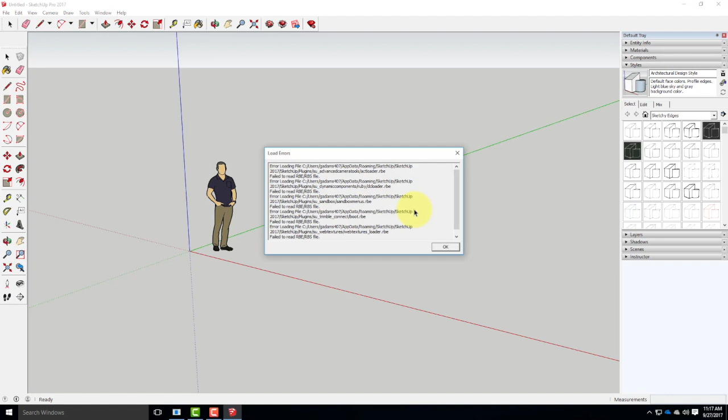So I'm going to go ahead and use the architectural design feet and inches, as that loads up. We'll give it a second to pop up all its errors, because of course on the school computers we can't have everything work perfectly, so we have to have some errors. And once that's done, I'll be able to get my geolocation. There we go, there's our errors. Let me get rid of the little person here.

Don't need him. And I'll go to File, Geolocation, Add Location. This is where I'm going to pick a particular location. Let's go ahead and go into Mount Diablo and do something in here maybe. Yeah, like that. I'll click Select Region. We'll go ahead and grab it.

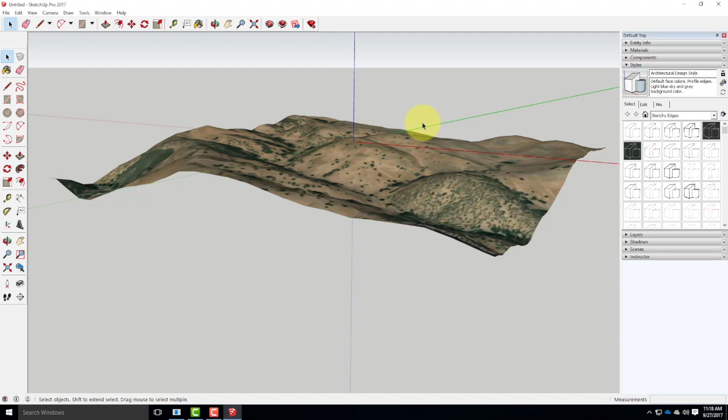And I can view this by going to Geolocation, Show Terrain. OK, that looks reasonable, and I can go from there. Obviously, this isn't the one that I'm going to use for today, but I'm just going through the practice.

I'll go to File and then Save As. And we just want to make sure that this is a SketchUp 2013 file so that it's ready to come into Rhino. So I'll go ahead and save it into today's folder. What are we on? There we go. And I'll go ahead and save. Perfect. Then we'll go ahead and switch over into Rhino.

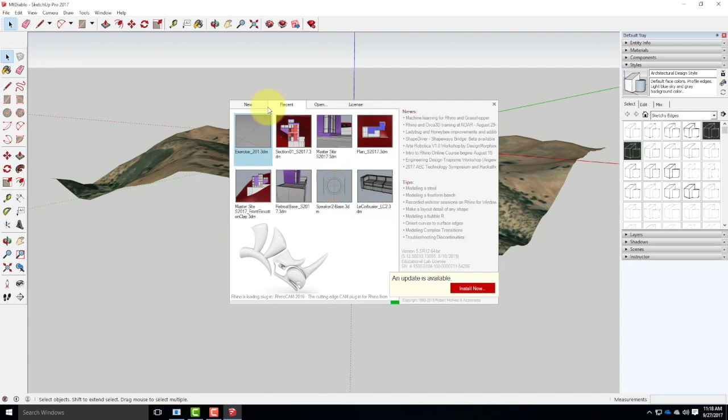And I'm going to create a new large object, inches. And eventually it'll open. There we go. And once I have this here, I'm going to bring in that SketchUp file.

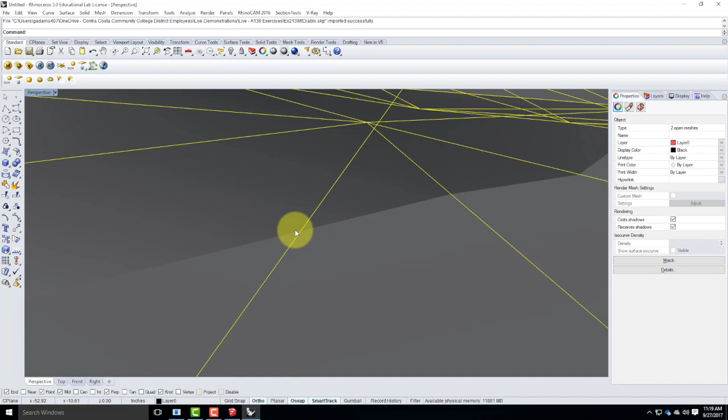So I'll go to File and then Import, and I will pick that file that I just created. There's Mount Diablo, let's bring that one in. Default SketchUp import options are just fine. We'll say OK, and then we'll zoom out and we'll have a look at what the resulting piece is.

So first off, I don't need this flat plane, we can make that go away. And then I'll clarify my layer structure here. We'll create a main layer called SketchUp, and I'll put all of the Google Earth terrain and snapshot and whatever, if I can hold down Shift correctly, there we go, onto the SketchUp layer. And then we'll minimize that and leave it for later on.

We're going to create two other layers because I'm going to do the contours of this mesh to create the NURBS surface. So I will go in and create a contour X and a contour Y. And then I need to go ahead and make those contours.

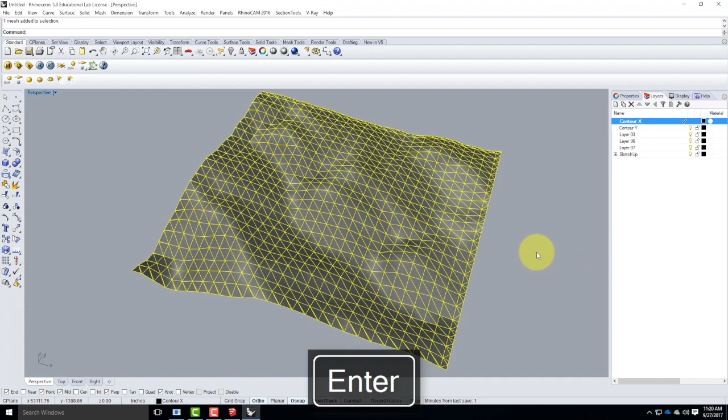So with contour X selected, I'm going to go ahead and go up to Curve, Curve from Objects, Contour, or I can just type Contour. Select objects for the contours, it's going to be the mesh. I'll hit Enter. We'll start at this corner. If it's not snapping, remember to turn on your vertex snap. There it is, and we'll go off in the X direction here. And my interval, we'll do maybe 100 feet.

There we go. I'll switch to contour Y as my layer, and we'll do the same thing from the same point. Go off in the Y direction, 100 feet. There we go, so I have contour X, contour Y.

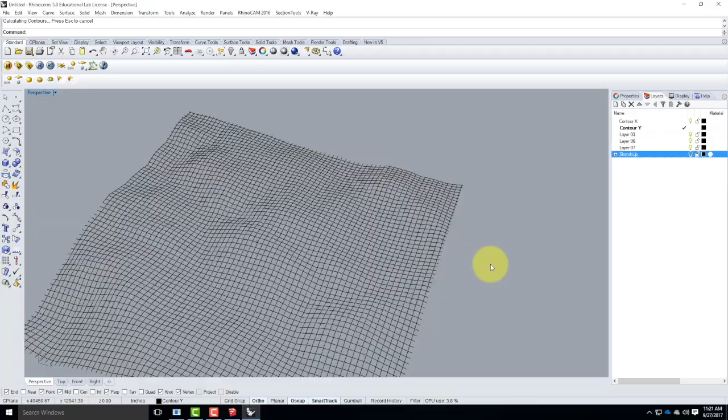At this point, I'm going to turn off the SketchUp file altogether. I'm left with just the little wire mesh that represents my terrain. I need to trim off those extra pieces, so we'll come in here. Let's make top full.

Once I have those selected, I'll go ahead and go to trim, and we'll get rid of the pieces on the sides here. There we go, so that's all nice and clean. Let me zoom extent so we can see the whole thing.

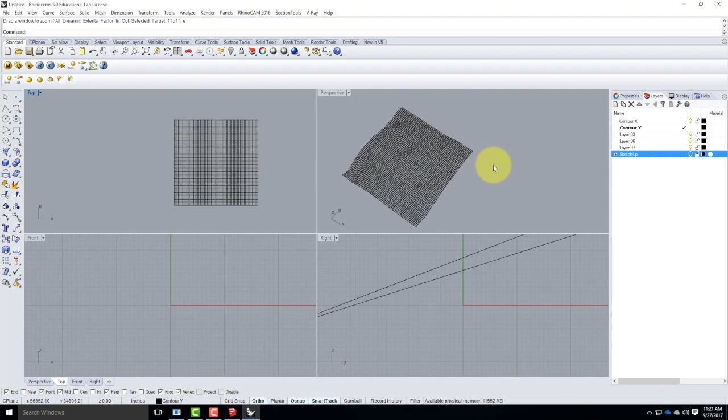It's clean edges, we're ready to make that NURBS surface. So in order to do that, I'm going to do the curve network or the network surface. I'll select my curves and either type network surface or go up to surface, curve network. Yeah, that's fine.

Actually, before I do that, let me create a new layer. Let's call this terrain and make that the active layer. And then we'll do a network surface.

There we go, it automatically recognized correctly. And we'll give it a little bit of time. Remember, this can take a few minutes to process, so let it go through.

Yeah? Last question, just a quick question. Whenever the layer is selected and we do any changes on the screen, is it automatically set to that layer, or do we have to change the layer?

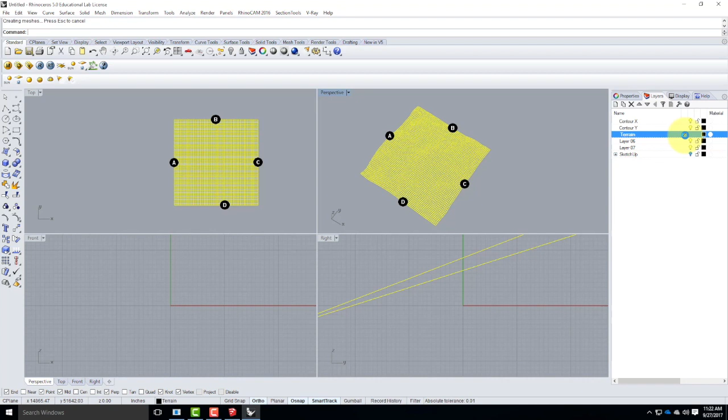As long as the layer has that little check mark next to it, that means it's the current layer, so anything that you do will show up on that layer. And we don't have to right click on the layer to change that? No, because it'll be on that layer by default.

OK, so I have that. I'm going to click off and then click on the surface itself, which is, remember, that really dense surface, and I'll go ahead and rebuild that surface. So I'll type rebuild, or I can go to the edit menu and select rebuild. It would be under edit rebuild.

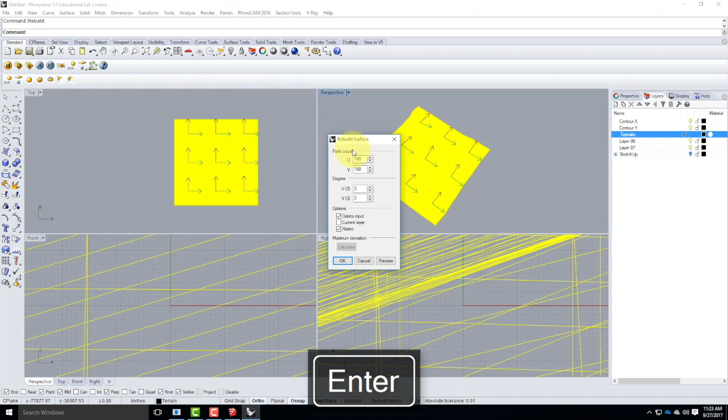And I'm going to do 100 by 100, and I'll go ahead and say OK. Remember, I thought that was about the happy medium point. You could do something a little bit finer if you wanted, or a little bit less.

Let me turn off the contours in X and Y, and we'll have a look at this surface. Yeah, it's pretty good. It's got a little bit of the triangulation, but it's reasonable. So I'm going to go with it as my 100 by 100.

OK, so now that I have my terrain set up, now I need to start thinking about this as if it were a physical model that I was going to cut out. And that's where the little cheat sheet comes into play.

So it was available on the course website, which of course I closed down, so it's not here for you to see anymore. It would be under exercises, and if you went to today's exercise, it's linked down at the bottom, but of course I'm not logged in, so you can't see it. But anyway,

when we look at that, we're looking at that little chart. It's on the bottom of your handout anyway, just in case. And we're looking under the 11 by 17 size. And we're going to make a rectangle at the scale that we want to be at.

So I'm going to use 1 to 250, which would be the rectangle would be 4250 feet by 2750 feet. So I'll go ahead and create a rectangle.

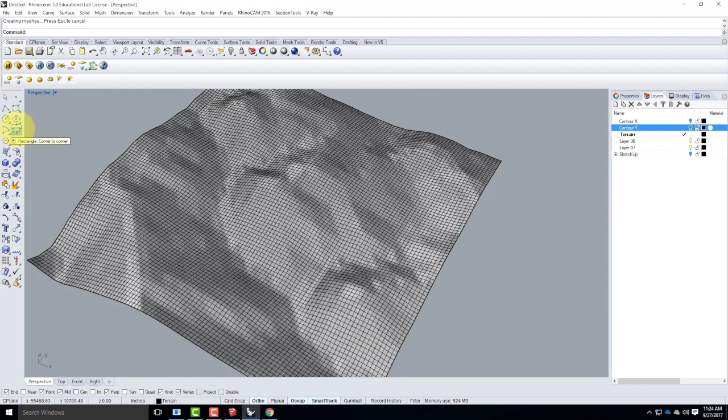And I'm going to move it later on, and I'll say at 4250 feet, comma 2750 feet. Remember to put those little feet signs in there. There we go, there's my rectangle, and now I just need to position it over the terrain in the place

that I want. It can be a little challenging to figure out where that position is. Sometimes if you switch from wireframe into shaded mode, you can kind of see what's happening and pick the desired region. Sometimes you have to kind of look at it from the top view and decide which one looks right.

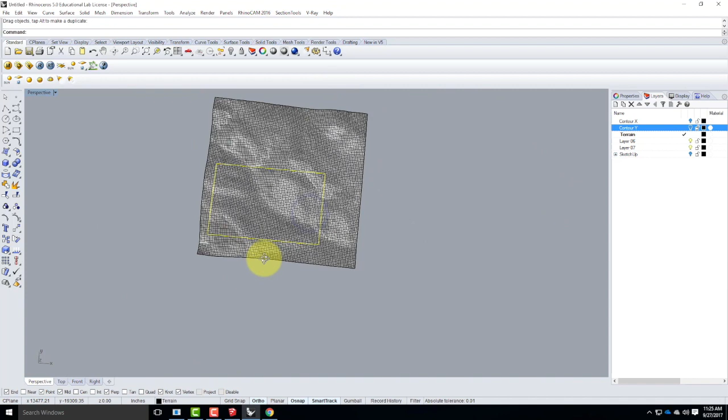Once you have that set up there, then it's a matter of I need to project this rectangle down onto the surface so I can trim off the extra. So I'll go back to the top view. There it is. I'm going to type project, or go to curve, curve from objects, project.

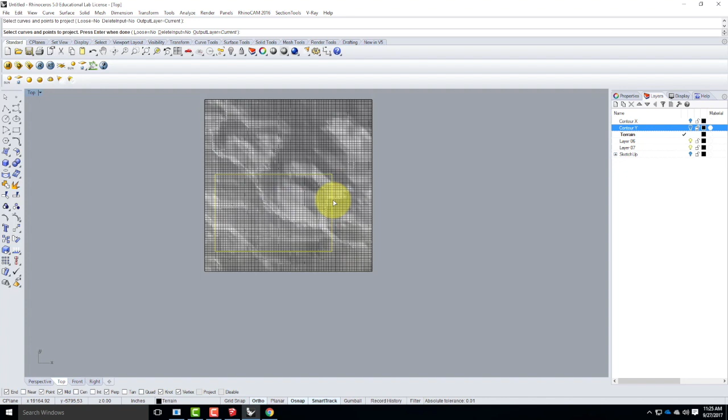It's going to ask me to select the curve first. So there's the curve I want to project, and I want to project it onto this surface. I'll go ahead and hit enter.

If I switch into the perspective view, we now see that that follows the contours of the surface itself. I can then go ahead and go to trim and trim off the extra bit of surface.

This is the piece of terrain that I'm going to model in 3-dimension. When I scale it down at 1 to 250, this is going to be 11 by 17, which fits nice and neat on the laser cutter, which is of course what I want. So now that I have this established, I need to do a few more things as part of this.

I'll create a new layer, and on that new layer, let me rename it here. Come on, oh I have to get out of my trim. Sorry, there we go. Let me rename this, and I'll rename this one to be, let's call it model steps.

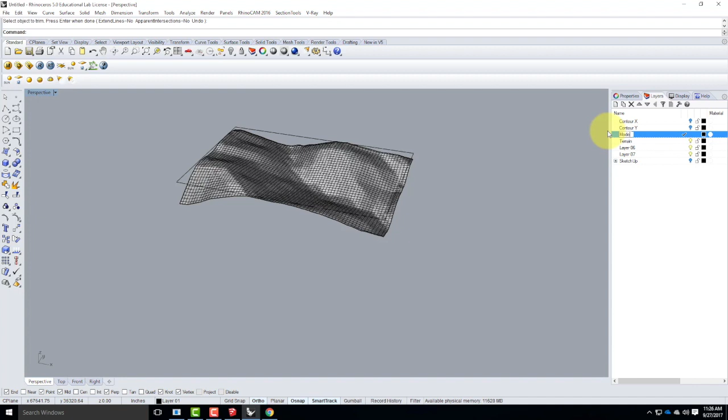It's the current layer, and I'm going to slice this piece of terrain up into the thickness of the cardboard that I'm making the model out of. Remember, the cardboard's 5/32 of an inch, assuming you use the bookstore cardboard. If you were using a different material, you'd have to measure it carefully. But I know it's 5/32, so we're good.

And I need to find out on that chart again, at 5/32 of an inch, at 1 to 250 scale, how large is that step? It's 39.063 feet. So that little chart helps you out there.

And when I create the contour, so I'll type contour, we'll start down here at this point. Remember, it has to go in the Z direction, so a lot of times you have to move into one of the side views to go straight up in the Z direction. There it is. And my interval, or my distance between contours, is going to be 39.063 feet. I'll go ahead and hit Enter.

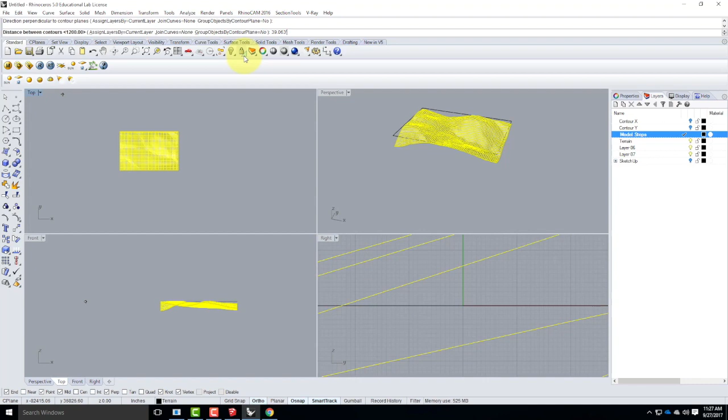And it will slice up this particular piece of terrain for me. At this point, I can go ahead and turn off my terrain and any of the other layers that I'm not working on. And now I need to go ahead and set up the steps for the sides of this particular piece. Like I said, we're going to concentrate on fixing the problems that happened last class as we go forward. But I'll go ahead and go through.

I picked deliberately a contour that wasn't quite as steep as my last one, but I also have my last one ready. So I'll show you that one too, but I'll go ahead and go through this one because it's not going to take too long.

So I'm going to create a new layer, or rename this layer, and we'll call this model sides. I'm going to change the color of this layer to be red, just so that I can see it in contrast to the other things that I'm working on. Let's go ahead and put that up next to the model.

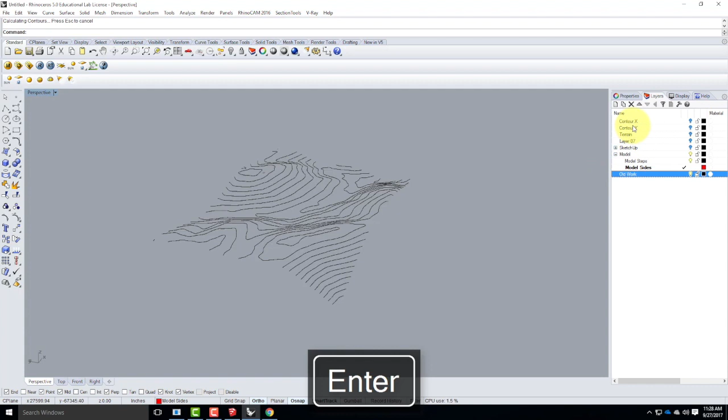And you know what, we could take this a step further and create a new layer called model, and then put the model steps and the model sides underneath the model layer in the interest of organization. I could also create a new layer that's outside of that stack, and I could rename this old work. And I could take Contour X through SketchUp and drop it onto the old work layer and minimize that.

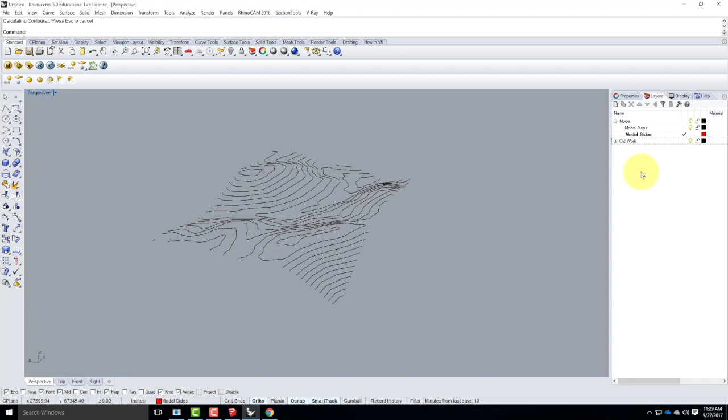The more you start to get in the habit of cleaning your layers, the more when you have 150 layers, it suddenly is a little bit cleaner because you were thinking about it in the process. If you don't, you'll end up with a couple hundred layers and you'll be confused. So the more you clean that up, the easier it'll be long term.

So I now have my model sides layer active, and I need to go ahead and draw the steps as they go. I'm going to start right here on this side. Remember, there's two different methods for doing this. Actually, I'll start on this side because it's fewer steps to do the first method.

The first method, I'm going to go ahead and create little points on the ends of my lines. In this case, I don't want the single point. I'm going to right-click to get multiple points, and that will allow me to stick points on the ends of all of these curves.

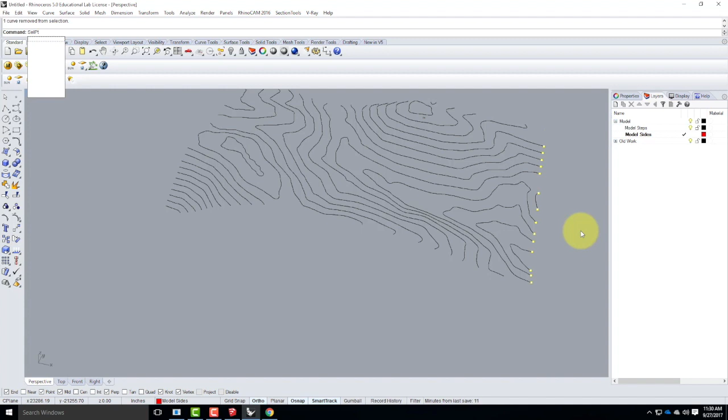So I have that with all those points. I'm going to select those points by dragging a box around them. If I do that, I have to deselect that curve because I don't need that curve. I could also type SELPT for select points, and it would select all of those points, just those points.

Then I'll go ahead and rotate 3D to rotate these points down so that they're flat. I'll pick that point there, go off into space, and fold those down flat.

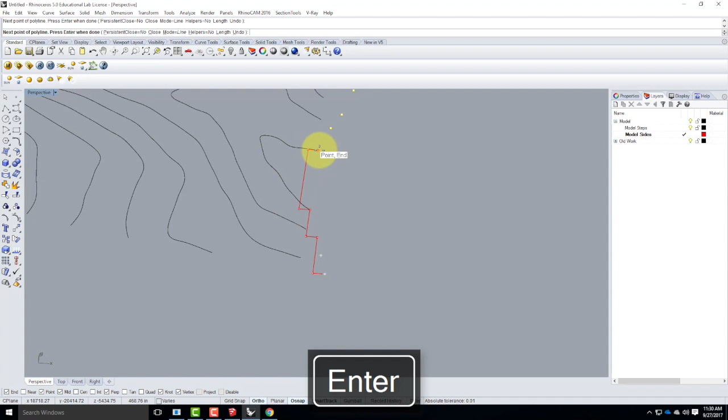Now I can go ahead and start to work through with my steps. We'll start at this point there and snap to perpendicular. This one, I have to go down, over, and back up. I know what the distance is - it was 39.063 feet. I can then go over and start to work my way back up this side.

So you guys are just going to have to bear with me for a little bit while I work through this.

OK, so there, at that point, I'm going straight across, which means that I'll go straight across here. Then I have to go back down to catch this next point, which I don't get to because it's going just this distance - 39.063 feet. That will come over and then back up.

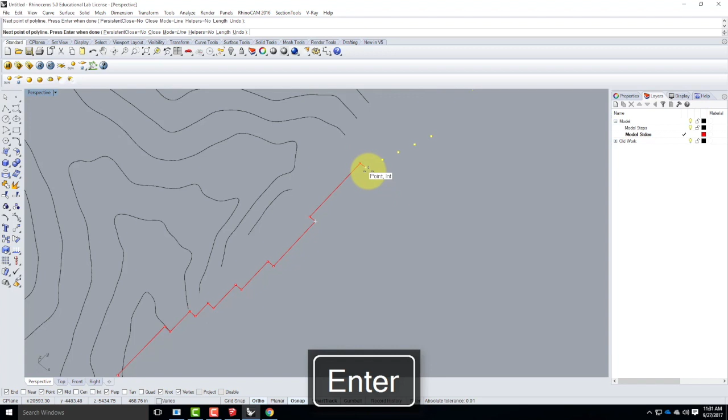So it's a little bit challenging to see what was happening there because I had just the crest of a hill and then I went back down and then I'm going back up again on this edge. So I'll work my way back up the rest of these pieces there.

And I'll go ahead and end. Oops, one more little piece right there. While I have it, let me join those two.

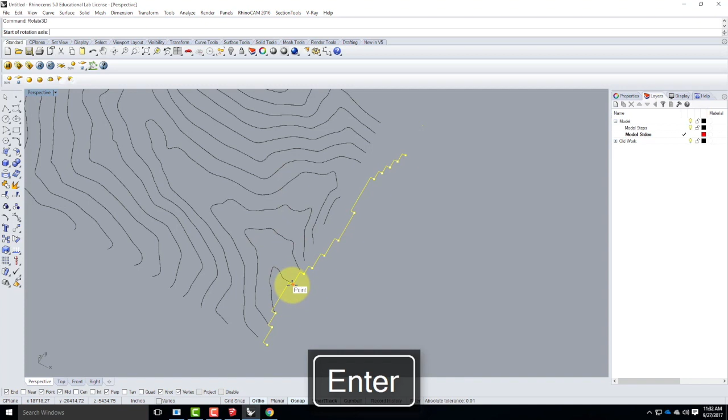And then I'm going to go back to rotate 3D. So I'll select my curve and then SELPT for the points. And then I'll rotate 3D, same point that I rotated from last time, and we'll fold those back up.

If I did it correctly, I can look at the side and say yeah, it looks like the steps work and they all line up. I can also confirm they're working by looking in one of the side views and seeing that all of the steps are vertical as opposed to being slanted. So that worked out pretty well.

Now, as I start to look at this, remember I told you this time we were going to spend some time looking at the corners and how things connect. It looks like there's a tiny little bit of a contour here in the corner that was left over from my contour. This particular piece is never going to work on a laser cutter.

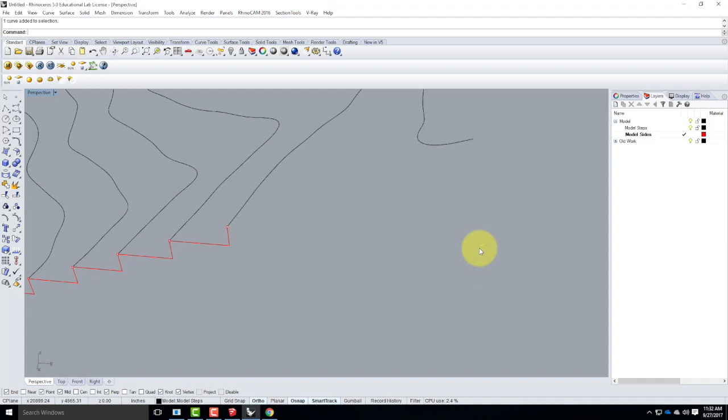It's just too small, so I'm going to go ahead and safely just get rid of that piece. It's okay for you to do a little bit of editing like that. Likewise, this corner piece right there is pretty small, so I'm going to go ahead and just get rid of that as well.

If the corner piece is big, or like in this case this sliver, it's kind of borderline - it might be okay to be there, it might be too small. Worst case is it gets burned up on the laser cutter, and then you just don't put it on. So for right now, though, I'll leave that one.

But I need to do the steps along the backside here, and then we'll concentrate on joining them together in a second. So when I do the steps along the backside, instead of doing this point method, I'm going to change that C-plane and adjust it so that it's vertical running along here.

And I do that by going to the little triangle next to where it says perspective, and I go to set C-plane 3 points. I'm going to start right there at that point, go off in the X direction in this case, then make sure that I'm going up vertically from that point. So we'll go right here to where I'm going up vertically. And if we look at my little grid, it's flipped around to be in position.

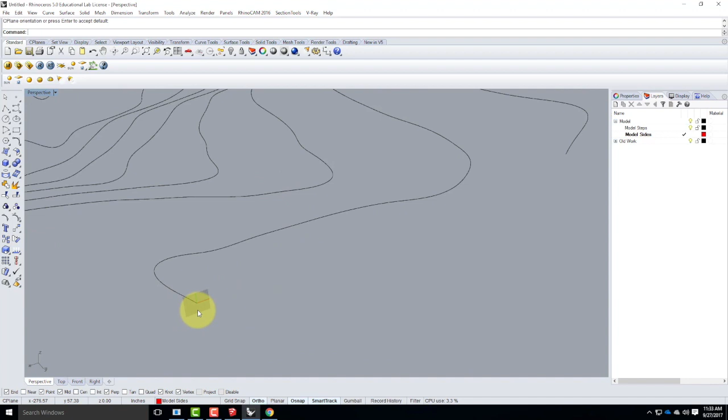If you want to see a little bit more of that grid, you can right-click on the grid snap button, go to settings. There we go. And I'm going to just bump it up to a grid line count of 2000 just so you can see it a little bit better.

Once I have that CPlane changed and it looks the way I want, then I can draw just straight along one side. So we'll start right there and we'll come over until we meet that point.

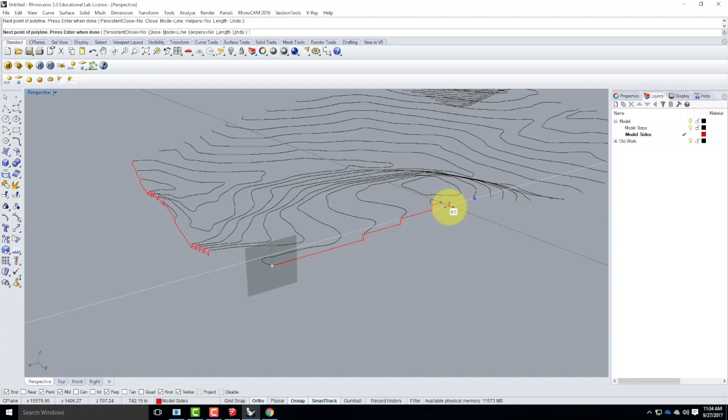And then we'll go back down this side. Oops, looks like I made a mistake there. I wasn't quite on the end. There it is.

Easiest way to do this is to hover over the point and then pull it back along the SmartTrack line. So I hover and then pull back until perpendicular.

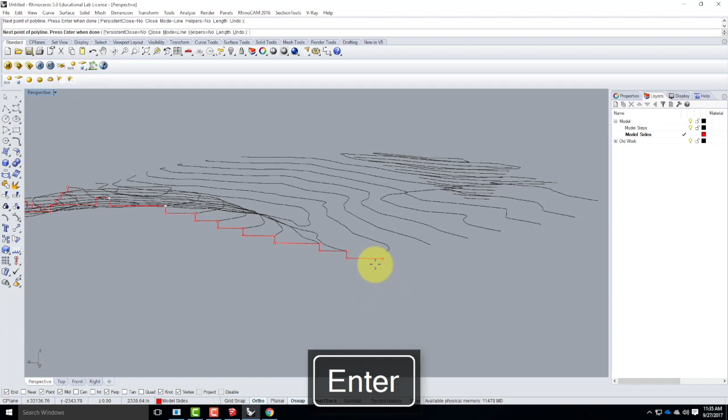Okay, here I am at the bottom of a valley. This has to go down by 39.063 feet, straight down. Then we're going over, and then we start back up this side.

Okay, so I finished to that point. So we have a corner, and I told you we'd start to consider the corners. And the contours don't meet conveniently at one of these corners at all. So what I need is I need to create an intersection in my lines such that the steps follow around.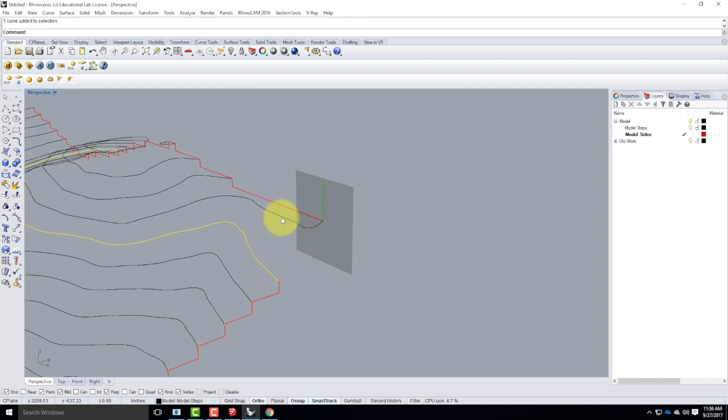So this line right there is the next contour after this one. So there's a step between this level and that level, and I need to figure out where that step happens. Well, the step always happens at the next curve. So I would go straight here, and then wrap around my corner at the same level, and then step up here.

So I'm going to go ahead and draw from this point, because my C-plane is still here. I'm going to draw down by the 39.063 inches, and I'll just draw out at some arbitrary distance that's past where my line is.

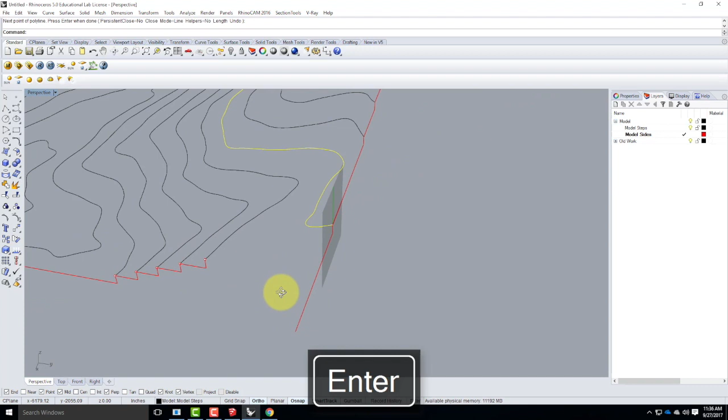Then I'm going to go back to my set C-plane world top to reset everything back to normal. And then I'll go from this point over till I meet up with that line. It should show a perpendicular snap there. I can then trim this.

So that that goes away. And I now have steps that meet where they're supposed to meet. So you kind of have to work your way around and see what's happening.

Some of you will have a line that is exactly in the corner, and that may be the case over here. I'm not entirely sure yet. So let me go ahead and draw a line from here.

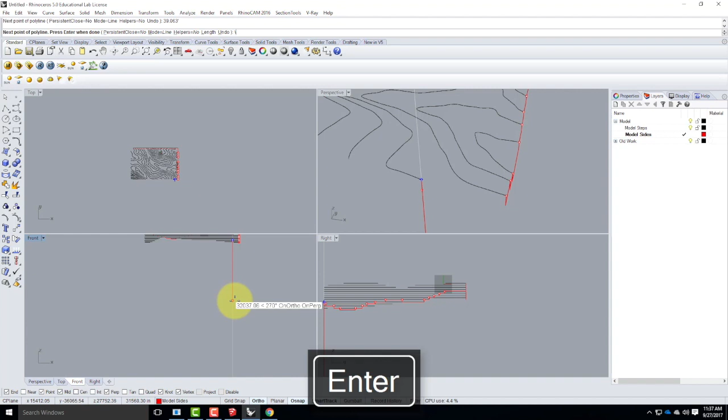And I'm going to go down by the 39.063 inches, and I'll come across there. Nope, and in this case it looks like, once again, they don't meet on that corner.

So I'll go to trim, and I'll get rid of that extra piece. You do want to make sure that the side is completely joined. So from there, I'll make sure that's joined, and I'll make sure that adds. So that's all one curve. That's going to make a difference later on.

So the same thing would happen on these other sides of this particular model, and I'm not going to go through and do those other sides. What I am going to do is I'll save this for now, and then I'll open up my previous one from last class, and I'll show you those corners, because there's 4 corners to deal with there as well. So let me go in and save this for today so we can come back to it.

All right, and then let me go ahead and open up -- oh, well, you know what? It looks like I don't have the one from last class. It must not have did its correct syncing.

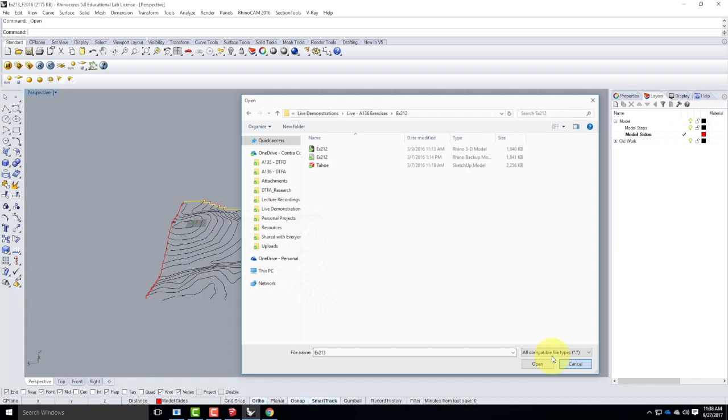So I'll just continue around this one, and you guys will have to bear with me while I do a few extra steps. So let me go ahead and reset the C-plane to do this one along the front here. I'll go back to my little triangle, and I'll go to set C-plane. And this time it's going to be 3 points.

I'll start right there. We're going to go off in the X direction first, and then we will go straight up from that point. There it is. We can confirm that it looks right in the 3D view, or in the perspective view. And then I'll go ahead and work my way up this side.

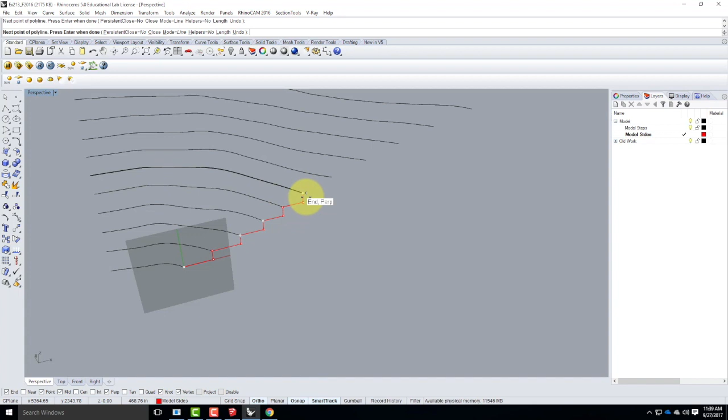I'm going to go straight across to catch that next contour, and then I'll start working my way down.

Okay, so we have to do a quick little join. I'll take this piece and type join, or go to edit and then join. And then I have to do this one last side of steps.

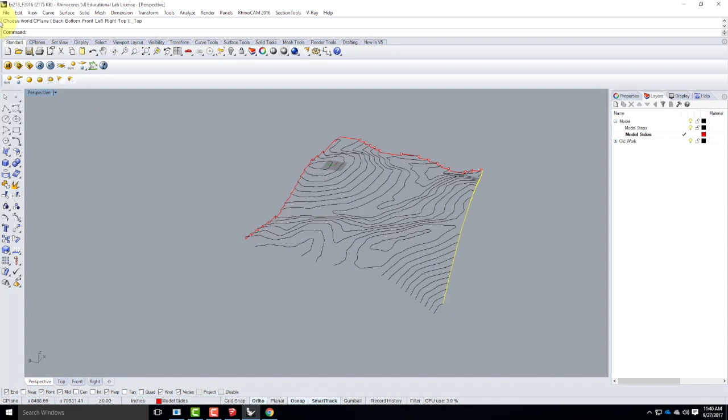When I switch C-planes, remember I always go back to world top to reset everything. Then I go to set C-plane, 3 points. This time we'll start on this side, but we're going to go off in this direction. It does have to go straight up. There it is, and we can confirm that it looks right in the perspective view.

I'll go ahead and work my way up this side of steps. So we'll go from here.

As I said today, once you feel like you've gotten to where all the corners are solved and whatever, it's not a bad idea to have me come by and check on you to see if the corners look correct, because you'll run into problems if they're not.

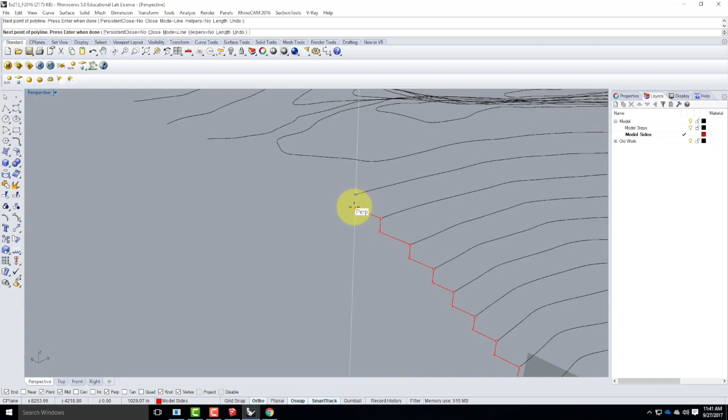So we're going to come across to right there. Then this is going to go back down. Yep, 39.063 inches.

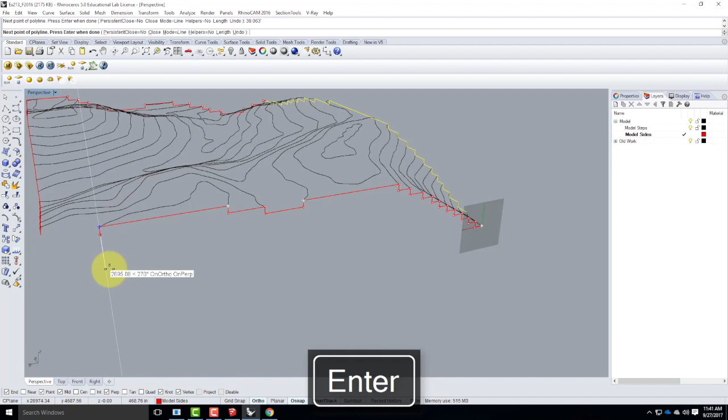Go across, catch this point, and then start our steps back up. Across to that point, down 39.063 feet. Straight down. And I'm going to leave this one long because, once again, it's going to match up with this point there.

Perpendicular. A little bit of trimming there. Let me go ahead and reset the C-plane, so I'll go to Set C-plane, World Top. And I have one more corner to double check.

Looks like this is going to have to go down, over, and then back up. So let me set that C-plane again. Let me go to Set C-plane, 3 points. We'll set it right here.

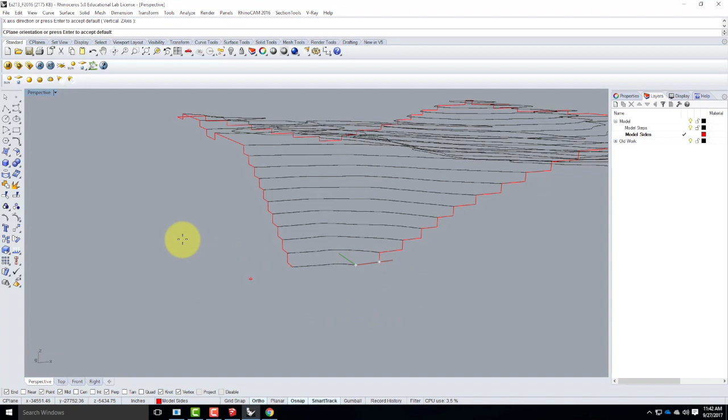And we will go down by 39.063 feet, leave it a little long. This one will go down again by 39.063 feet, and they should meet perpendicular. And then we'll do a quick little trim.

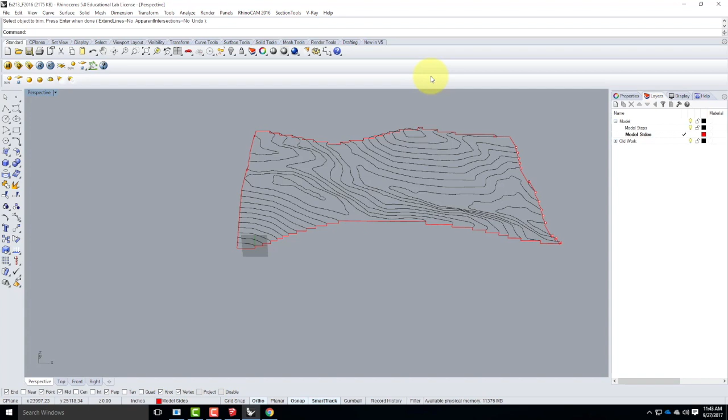So now that I've gone through and I've made sure that all of my sides match up and that all of my steps look correct, I need to start thinking about this as a 3D model. This is essentially where we got to last class. Now we're going to start the new stuff, the new assembly and laser cut file from here.

So I have these steps figured out. I'm going to go ahead and get rid of these points on this side. I'll type SELPT to select those points and press delete so they go away, so they don't confuse you. Then I want to make sure that each side is joined.

So this side, for example, we'll type join. That's all one side. I'll go through and look at this side - okay, that side is all joined. I'll look at this side - looks like that needs to be joined.

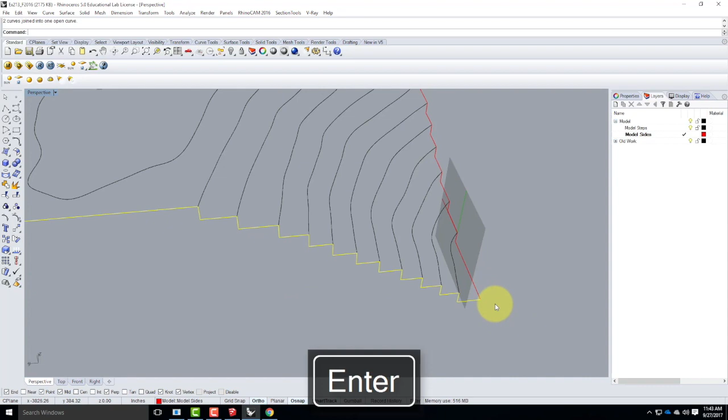That needs to be joined. We'll go ahead and type join. Now that's one whole side. And then this one is the last piece plus that - join. Great, so now I have those sides set up as well.

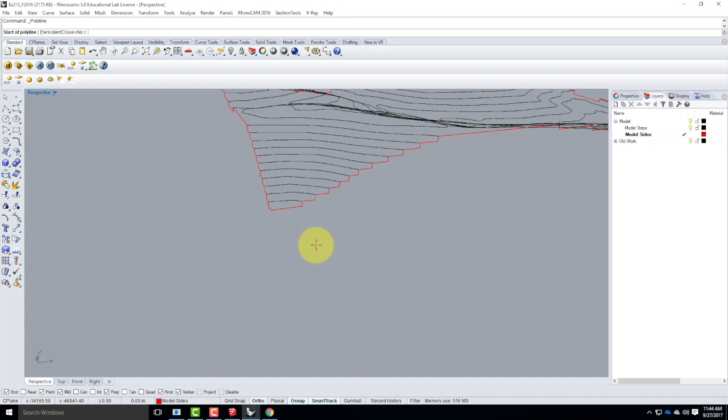Let me go ahead on my perspective view, and I'm going to set my C-plane back to world top. So I've reset it, and now I have to start thinking of these as if they're sides. I need to have a rectangle that goes below, like I would cut it out. So I'll start at the lowest point, and in my case it's this corner right here, I think.

I'm going to switch into one of the side views and go down an arbitrary amount. I could say what would be the equivalent of an inch, or I could do 100 feet or whatever - it doesn't really matter. I could also just click, so I'll go ahead and just click.

At this point I need to start creating the sides, so I can go back to the perspective view here. I can draw a line off in this direction. I can come to this corner and draw straight down. If I have perpendicular snap on, it'll come down and snap nicely to that point.

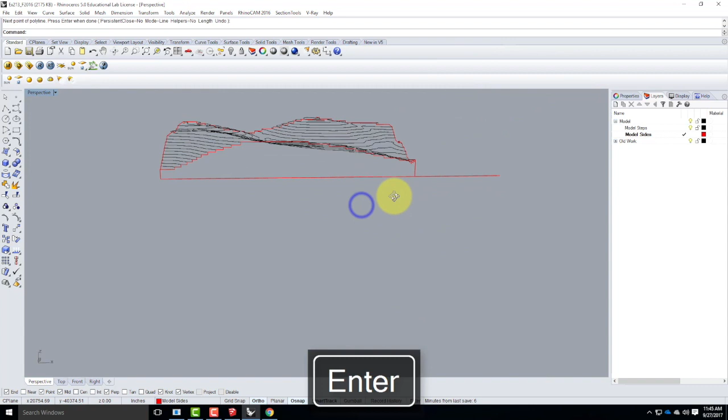I'll go ahead and type trim, get rid of that. Then I will select this plus the stepping side and type join. So now I have one closed curve that represents one side of my model.

So I can then work my way around the model. We'll start here, go back down to there, go over, make it a little long, and essentially repeat this process. There's perpendicular, trim.

Oops, sorry, I had the wrong thing selected there. Trim, get rid of that piece. We'll take those three pieces plus that piece and type join.

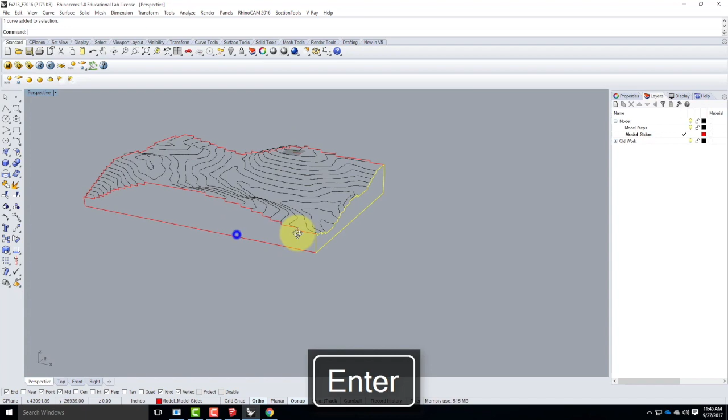So I have this closed curve now - I have this one in front, I have this one along the side. As I come to the back, I'm going to do the same thing here. Go from this point down, over. From this point down to perpendicular, trim.

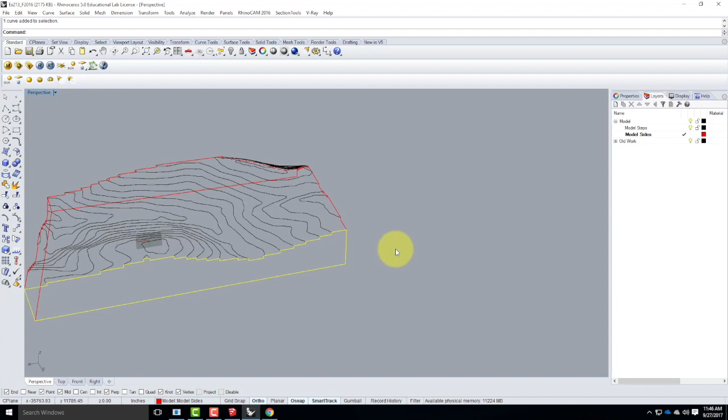There, and then join. It's going to be this plus that plus that. There we go. And then I have one more piece right here. This one's really easy because I already have both sides, so we'll go across and then back up. So I have that piece plus this piece, and I'll type join.

So essentially, now that I've created those sides, it's just a matter of folding them flat so that they could be cut out. So it's a rotate 3D on all 4 of these sides. I'll go ahead and type rotate 3D.

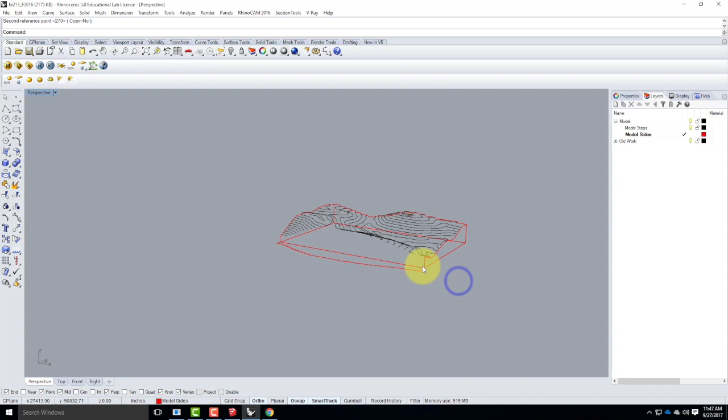We'll do this first one here, right along this base. Fold that one out. The only critical part here is that you're consistent. So if you fold them all out, that's fine. If you fold them all in, that's also fine, but they have to be consistent. So in my case, it makes more sense to do all of them out, right in place.

So now I have all of those folded out. If I were to look at these in the top view now, you can see that I do have the stepping sides, and they've been sorted out. I can move those up above here so that they're separate from this if I want to. It's just a matter of what feels more comfortable for you.

So the next piece is I actually need to have these contour lines projected down flat into a plane because I'm going to cut them out as a laser cutter too. So I'm going to do a new layer or a new sublayer here, and this is going to be the model. I'll call it model cut for right now. I'll make that the active layer.

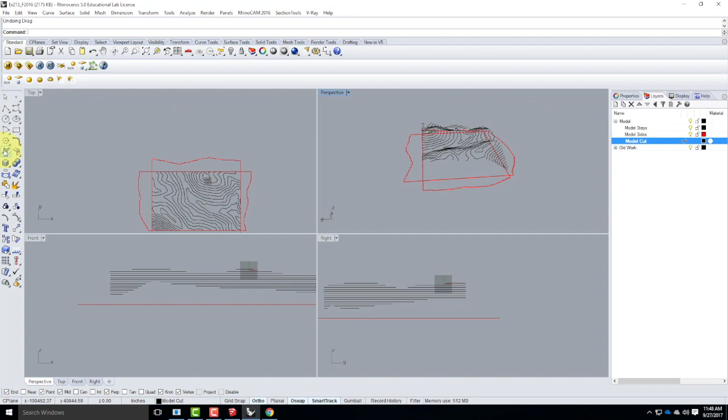And then I'm going to create a surface, and it can be just corner to corner right there. It could also just be an arbitrary surface that just floated in space. It makes no difference. And at this point, I'm going to project all of these lines onto that surface.

So let me go into the top view. I'm going to select my model steps. I'm doing it from the layer so that I don't have to drag the objects. I'll type project, and I want to project it onto that surface. I'll go ahead and hit enter.

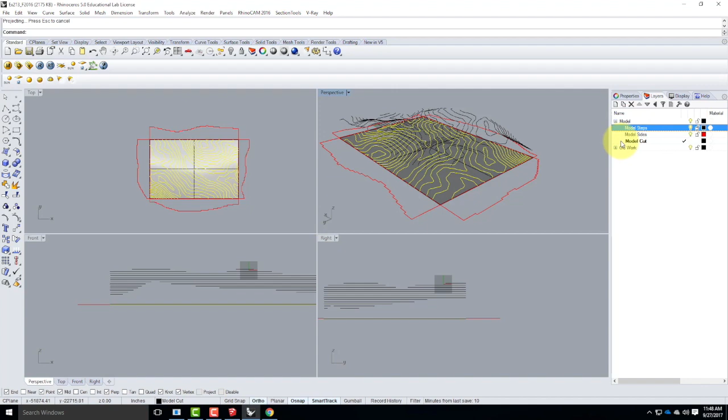And now I have all of those lines flat on a flat surface. At this point, I'll go ahead and turn off the model steps layer so that we're not confused anymore. We're looking at this flat now. And I'll go ahead and delete that surface that I used for the projection. So you can start to see I'm coming up with the pieces of the puzzle here.

So first thing that I have is my sides. Then I have all of these projected lines. Let me go ahead and draw one more rectangle right there, just for clarity purposes.

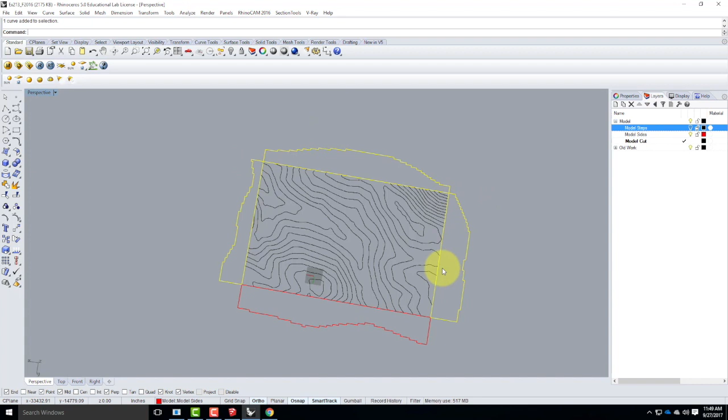Now let me take the sides, and I'm going to move them away. I'll just drag them out of the way. And so we have the sides that will be cut out, and we have one set of the topography lines that are here. Now as I start to envision this being cut out, I need to think about how these lines are going to be assembled together.

And I should grab the example so that you can see it. If I cut all of these lines out, I'd have no way of stacking anything on anything else because they'd just be a bunch of individual lines. So it wouldn't help me much.

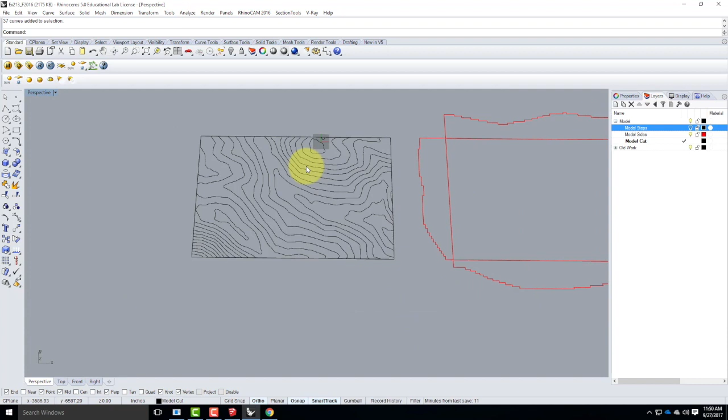So what I'm going to do in order to save space is I'm essentially going to cut every other line. And I'm going to cut this whole thing twice and flip. So let me explain, okay? The first thing that I'll do is create a second copy of this exact piece of topography. So I'll type copy, and I'll move it over next to it.

Then I'll start working my way up every other line. In this case, I'll select this first one, skip, select the second one, skip and select the third, like that. I'm holding down Shift as I do it, working my way up to this, which is a hill.

Then I start going back down the other side. It would be this one, and this one, and this one, and this one. As I continue down this valley, it would be that one and that one. I have to work my way up this hill, so it would be this one, but not that. And then working my way up here, here, ultimately to there.

That one might or might not be. I have to go back and double check if it's the same as this piece or not. I'm guessing it probably is.

So once I've selected all these, every other layer, I need to put them on an engrave layer. Let me go ahead and create a new sublayer. Oops, let me be on the model. New sublayer, we'll call this model engrave. And I'm going to change these objects to be on that particular layer.

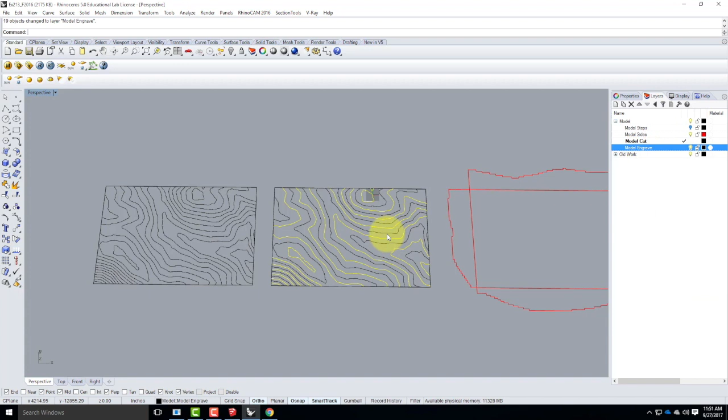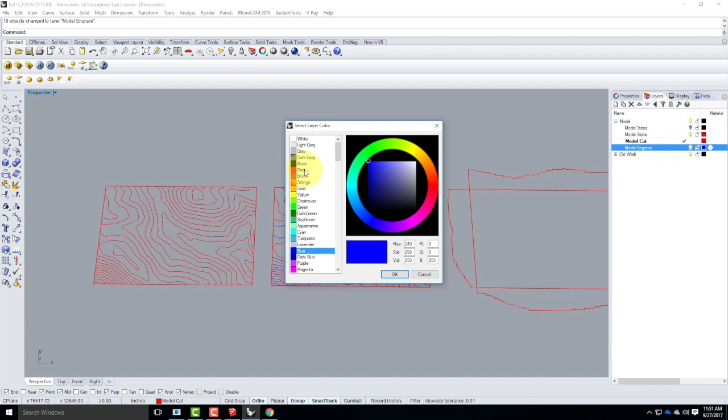Let me clarify a little bit by changing these colors to red and blue, which are the cuts and fills of the laser cutter. In Rhino, if you pick the default blue and the default red, they are the pure colors you need for cutting. I'm guessing a lot of you have cut before, so you're familiar with red and blue lines. The blue lines are the engraved lines, the red lines are the cut lines.

So in this particular setup, I started with this line as being the first one. That's an engrave, and I'm going to cut every other contour. When I come over here, I'm going to select the opposite set of lines. So instead of starting with this line, I'm going to start with that line. I'll hold down Shift, and I'll work my way up the terrain once again.

I'll work my way down the valley here. It's going to be that one. And it's not going to be those two because I selected them over here. Once I have all of those selected, I'm going to change those layers onto the engrave layer. So let me change object layer. There we go. And so while these two look the same, they're actually opposites of each other.

So each one is cutting every other contour. And when I go to assemble these pieces together, and like I said, I'll go get the actual example so that you guys can see it. Essentially what I'll do is I'll start with one piece from this stack, and then I'll glue on the next

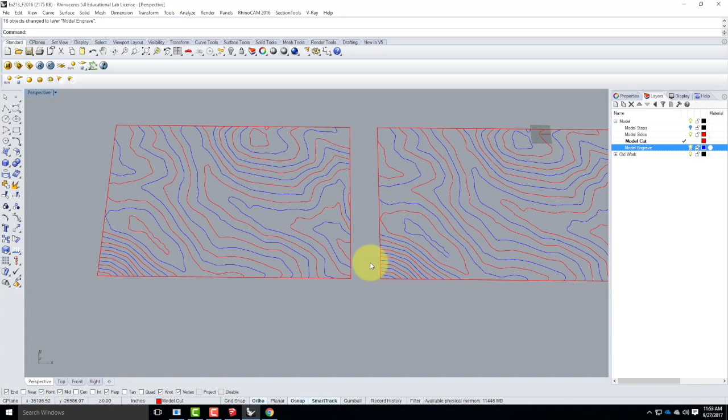piece from the opposite stack. So it's almost like shuffling a deck of cards. You take one from one pile, one from the other pile, and you put them together. Then you take the next one from this pile and stick it on top. Then you take one from this pile and stick it on top. And they're all going to glue nicely on top of each other and therefore stack up to make your terrain.

There are some issues when you go to actually do the physical model, and I'll do this in front of you so you can see it happen, where pieces don't quite fit exactly right, so there's some techniques for how you kind of fake it a little bit along the edges. Generally, it has to do with compensating for the thickness of the material on the sides, and I'll show you how that particular piece works.

So now that I have these two pieces ready to cut, I have my four sides ready to cut. That's all great. But if we think about cutting this out of material, we have a slight problem, and that is that there's a thickness to this material, and these four sides are the outer boundaries of my piece.

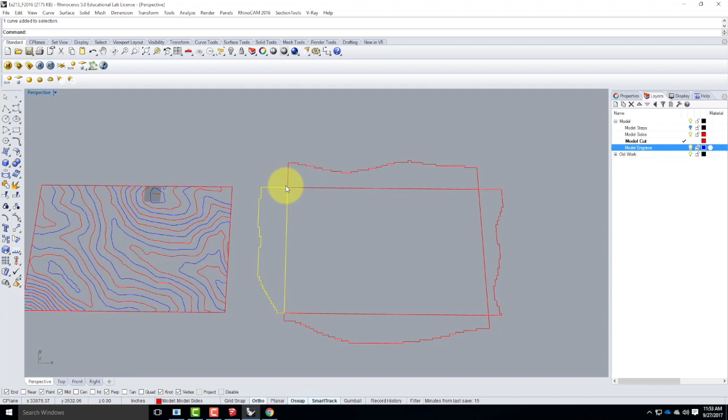So I know that there's 5/32 of an inch that I have to get rid of somehow. And it's easier to do this after I shrink this down to scale, which we'll get to in a second. But I'm going to chop off 5/32 from these two longer sides so that when I glue them together, they'll fit at the appropriate size. I'm going to compensate for that thickness of the material.

So it's now time to start doing our scale. I'm going to select all of the objects. I have them all ready. I'm going to type scale. Notice it's not scale 1D, it's not scale 2D, it's just regular old scale. It's going to scale everything at once. I'll hit enter. And I know that for this model, the long side is supposed to be 17 inches. Right? That's how I set it up.

So if I scale from this point to that point, which currently is 4,250 feet, I can now say my new distance is going to be 17 inches. And when I hit enter, everything's going to go away, because I just went from 4,250 feet to 17 inches.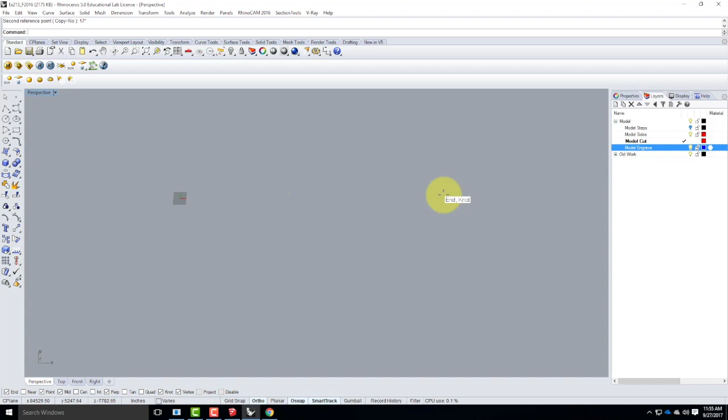So before you do anything else, type Z for zoom, followed by S for selected, and it'll recenter your view down to 17 inches. So we're now really, really tiny compared to the full size of the model. But I have the pieces I need to start building the laser cut file.

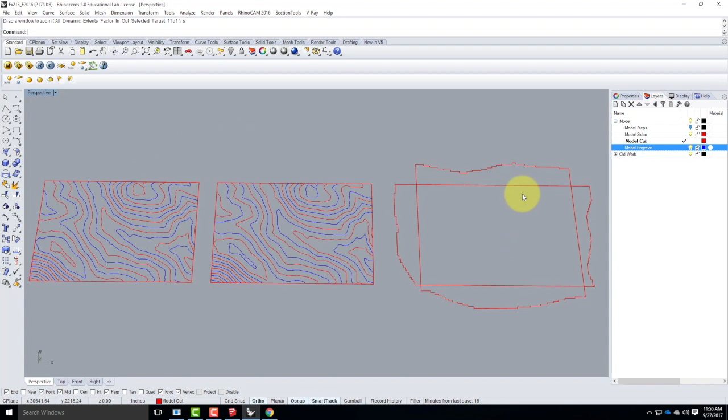So these two are ready. My sides are ready. What I need is some boundaries for the laser cutter bed so I can start to assemble how these work. Oh, and I did say I was going to cut off the 5/32 of an inch. So let me start with that.

Let me go ahead and go 5/32 inches. There it is. In that direction, we'll come across. I could also use my smart tracking, which is what I should have done. 5/32 inches. There it is. We'll come down to right there.

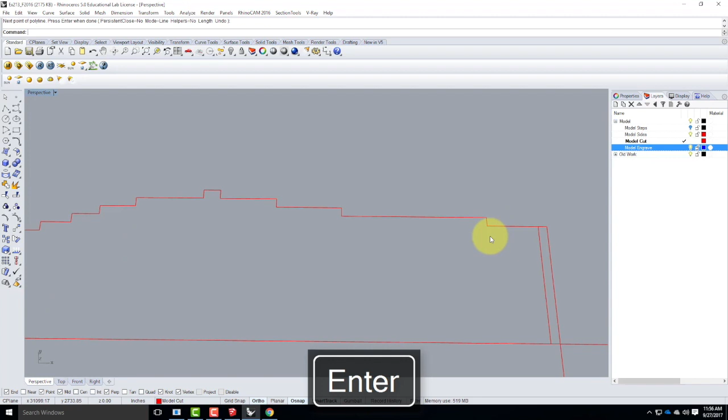Notice that that 5/32 is the same as one of the steps. This distance should be exactly the same as that distance because the steps are the thickness of the cardboard. So it should make sense. So I have those two pieces set up.

I need the same thing over on this side. 5/32 inches. One more over here. 5/32 inches.

Perfect. Now we need to do some trimming. So I'll type trim. Let's do it all at once here. And we'll get rid of that. And we'll get rid of that. Do all four sides have to be trimmed or just two? Just two of the sides.

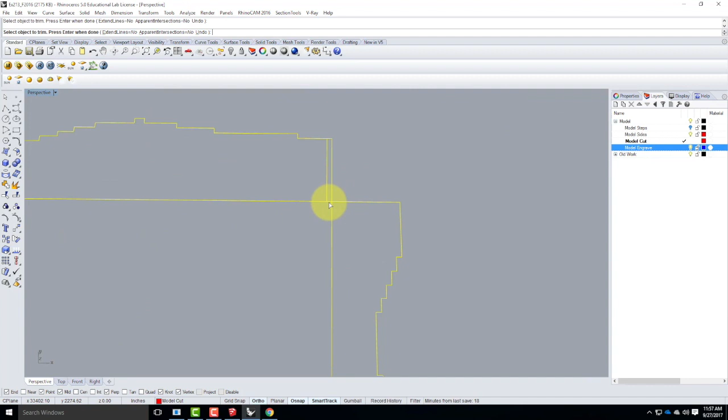OK, so I've now done that. Let's rejoin this and this together. I don't have to do that. Control, join. It just makes it easier to move and manipulate. And then join. Perfect. So now all my sides are joined. They're cut to the right size.

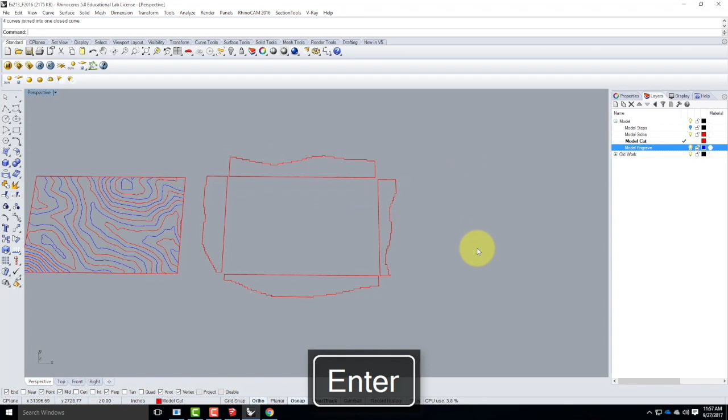I'm ready to go. But I need to figure out how these fit on the 24/12 laser cutter bed. So I'll do a couple more rectangles, and we'll start over here somewhere.

Now it is possible that when I go to do this, see how I'm getting that red slash? It's because this is floating so far away from point 0,0. It's where our scales are so whacked out in Rhino that it's saying, wait a minute, I can't draw this line over here. You can certainly draw it related to one of your existing objects.

So I could just pull my space over here, and then I could say at 24 inches, 12 inches. I could also move all of this back up to 0,0,0 so that it is back at the origin, in which case this won't be too problematic.

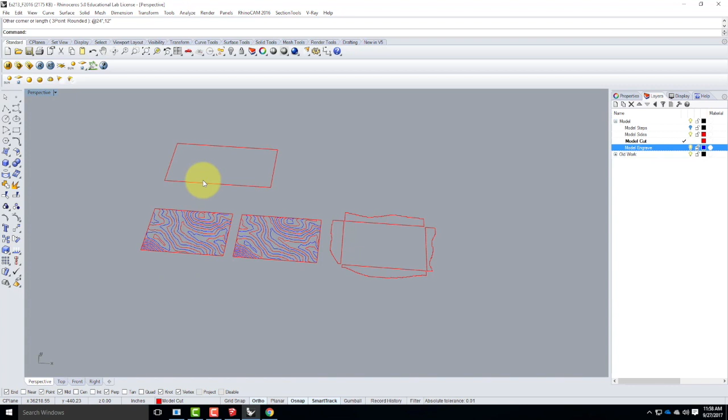So there's one laser cutter bed at 12/24. I'm probably going to need 3. So I'll go ahead and copy a few more here. There's 2, and there's 3.

Now I need to assemble these pieces onto that. So we'll take this first one, and then it might actually be easier to do this in the top view. Zoom S for selected. There we go.

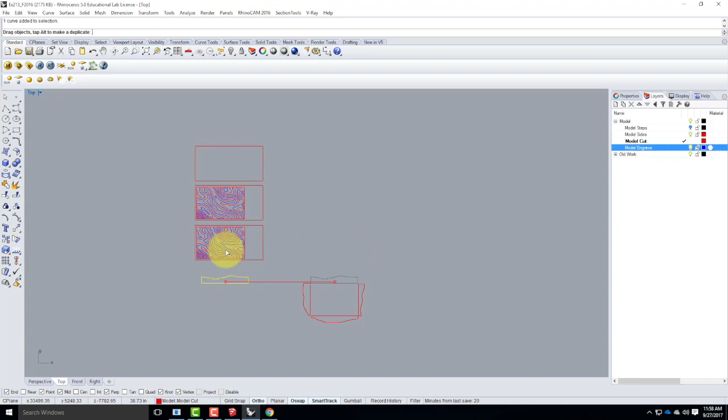I'll move this first one. There we go. Move the next one here. Now I need to start arranging these other pieces. So as long as I don't mirror them, I can rotate them. It's just important to make sure that I don't mirror them.

OK, so now I have 3 pieces of cardboard that I would need to cut. All of my pieces fit on those 3 pieces of cardboard. And at this point, I just have to create an AutoCAD file to take over to the laser cutter.

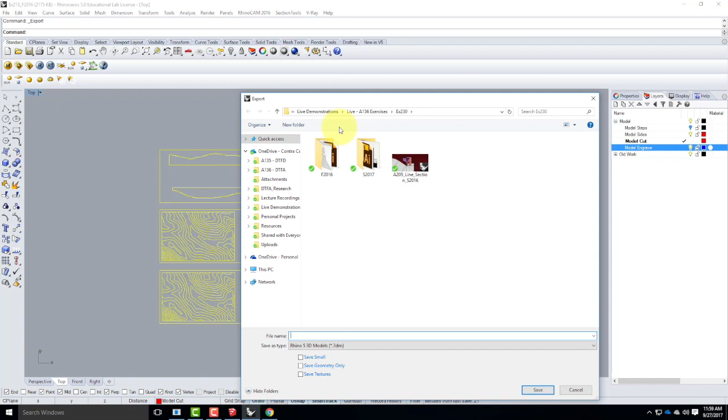So it's pretty easy. I'll select these objects, and I'll go to File, Export Selected. And I'm going to drop those into today's folder. So hold on a second here.

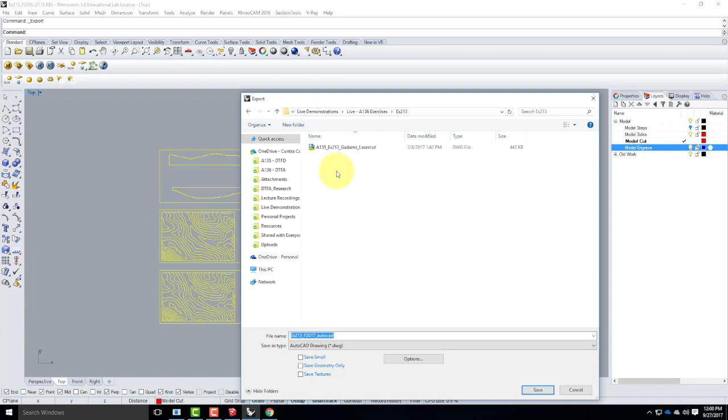Exercise 213, we'll call it AutoCAD, fall of 2017. I'm going to make sure my save as type is set to AutoCAD.dwg, which is an AutoCAD drawing file. It's perfect. I'll go ahead and click on Save.

The export options, we want 2004 polylines. That's just fine. It's nothing fancy, but we don't have anything fancy that we're doing anyway. And I'll go ahead and say OK.

And I've now written my AutoCAD file. If I go find that on my flash drive, go to my File Explorer here, there's that file. If I double click and open it up in AutoCAD, we can...

...confirm that everything looks the way it's supposed to look. This, by the way, pops up whenever AutoCAD opens a non-AutoCAD or Autodesk product file. Just go ahead and say continue. And there are my drawings, ready to laser cut.

Everything is set up correctly for the laser cut file except the line weights, which we can't do in Rhino. So we do have to do one little bit. If you struggle with this particular part, the lab tech should be able to help you do it. It's the one thing you can do on the viewer over there. You don't have to have real AutoCAD. You can make this adjustment.

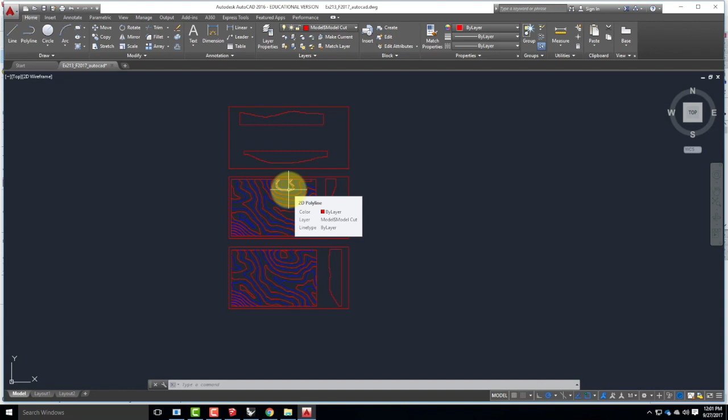To do that, I'm going to click on the layer properties right here, and I'm going to look at my layers. The red and blue layers are set up the way that they should. The 0 layer is AutoCAD's default layer, so just ignore that.

I'm going to make sure that under line weight, instead of saying default, all of these are 0.00. So I'll go through and click on each one and say 0.00, which is what the laser cutter needs to recognize them as a cutting line. So each of those is 0.00. That's all I had to do.

And I'll just click Save to save that file. At this point, I can put it on my flash drive and I can walk across to the laser cutter room and I can cut my file.

So as part of your assignment, I ask you for a couple different things. Number one, obviously, I ask you for the physical model. But I also ask you to post the digital file to show that you've created the digital file. This shouldn't be a problem because you probably can finish it today. Okay? You do have to make a separate post, though, for your assignment

202 versus today's exercise, which is 213. So if you finish today and you have your AutoCAD file, you need 2 separate posts to do that. Okay? It's important that you recognize that, because I'm not going to go in and assume that your exercise 213 is complete. I want you to say, yes, this is my complete file. The reason I ask you to post that digital file is so that you're done with the digital part.